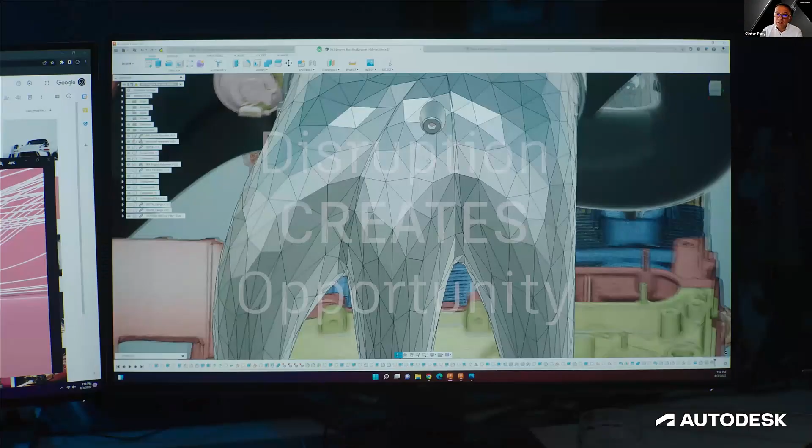The upshot of all of this is additional pressure on your team to deliver goods quickly, whilst minimizing costs, avoiding mistakes, and controlling waste. The good news is that this level of disruption also creates opportunities for all of us. In a static market, the incumbent suppliers are next to impossible to displace, but every now and then we experience major events that change the natural order of things, meaning those that can adapt fastest quickly become the new leaders.

We believe that now is the time to reimagine possible and to use this time of disruption and change to do things better. So for manufacturers like BBi Autosport that you see on my screen now, finding ways to control costs, maintain margins, fix supply chains, upskill people and attract young talent means they're better positioned to win market share today and grow their business tomorrow.

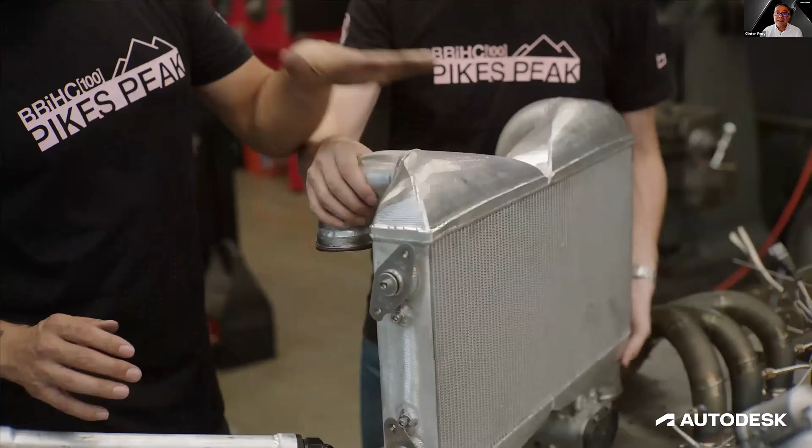Now, what do we mean when we say reimagine possible? There are many trends you can take advantage of right now. For instance, more and more industries are being transformed by smart products. This makes machine tools around us more productive, but it also creates opportunities as consumer demand grows, product developers expand, and supply chains onshore. Manufacturing processes themselves are increasingly becoming digitized, which provides greater flexibility and efficiency from the tools you use. And cloud technologies are changing how we manage our supply chains and the manufacturing processes we use, helping us deliver our products on time, every time.

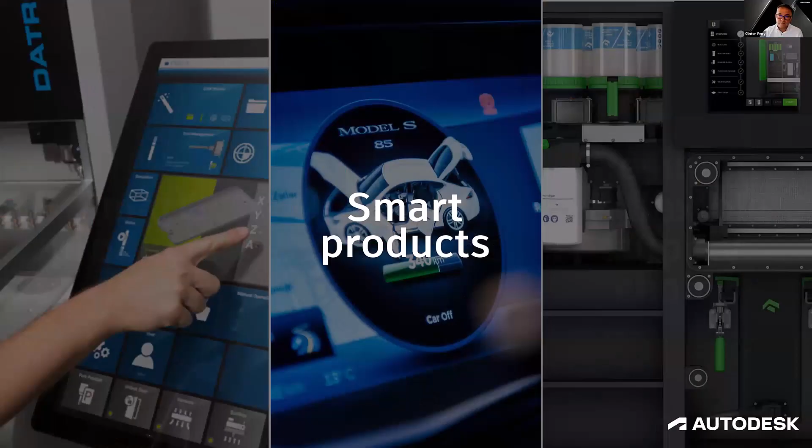Now, when you hear smart products, you probably think of an iPhone, a Nest thermostat, or maybe a Tesla. And that's certainly true in the consumer product space. But in recent years, we've seen more industries embrace smart technology, and it's playing an increasingly important role on the shop floor too.

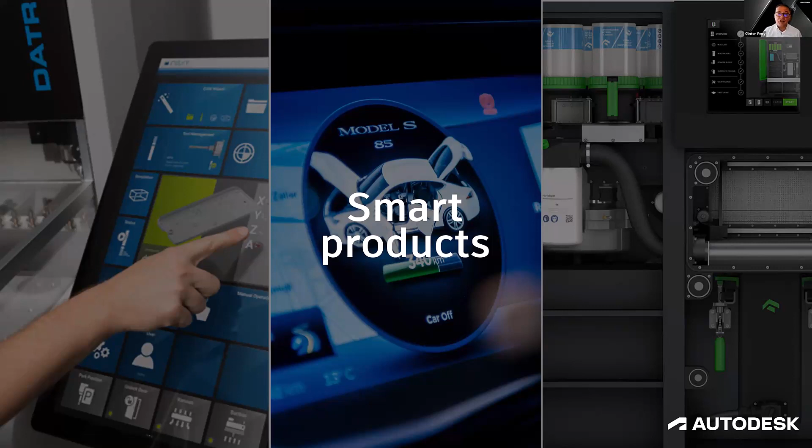Take, for example, smart hardware controllers from companies like Datron, One Click Metal, Haas, Mazak, and many others. These all represent the bleeding edge of smart manufacturing, and we expect to see this trend expand and accelerate across the rest of manufacturing. And it's not just products that are digitizing, it's also the processes we use.

Milling, turning, probing, welding, cutting, and 3D printing all provide a wealth of data for analytical purposes. But those processes aren't used exclusively. You use multiple processes to make your products. So it's a big problem when you have to use multiple software products to define and control your manufacturing processes.

And the situation gets way worse if you need to start making changes. So we believe that manufacturers like you want, in fact, they probably need a flexible platform, one that can accommodate design, simulation, milling, turning, fabrication, additive, and production management, all with data at the center of what you do.

And recent events have shown the challenge of connecting people and suppliers to this data, something that manufacturing has traditionally struggled to perfect. Now, we recognize the need for a flexible platform, one that can connect all aspects of the manufacturing supply chain, ultimately helping you to adapt faster.

Because investing in the right digital manufacturing solution can make the difference between winning and losing new business. And yet, despite all of these demands, manufacturers around the world still accept an old, antiquated experience.

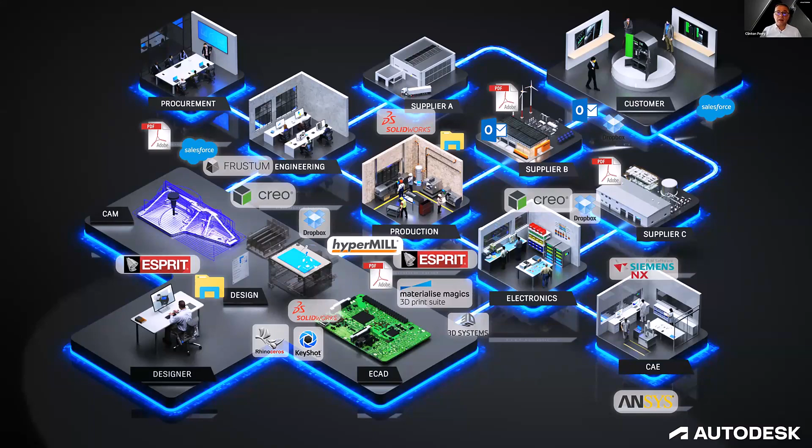Multiple software tools with incompatible proprietary file formats, poor data control with files being shared by email, wasteful manual processes and disconnected workflows, and a mix of digital and analog information. This all impacts your ability to work effectively, increasing the likelihood of mistakes, delays, and lost business.

And so, as manufacturers, we need to address these challenges, and we aspire to achieve 4 key values: to create better products, win more business, improve your operational efficiency, and finally, to enable increased innovation.

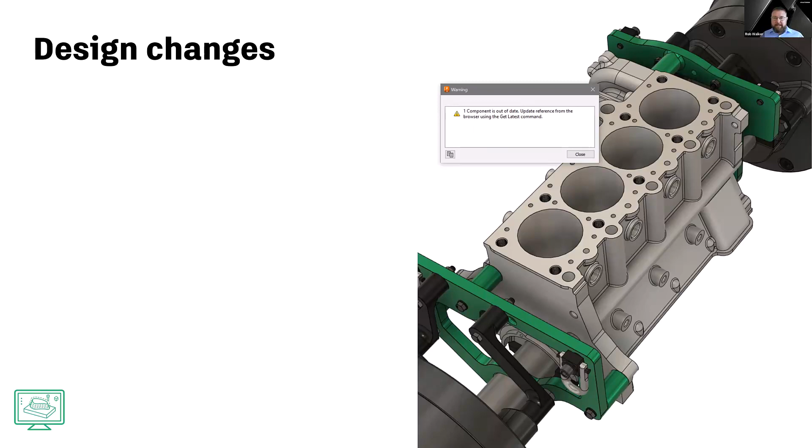Now, first, we have the need to cope with design changes. Design changes can be costly as they can delay production. But how are these changes communicated? What happens if a design change is not communicated before production begins, and what's the cost of this?

Now, the right software can help by simplifying the design revision process with seamless associativity between design and manufacturing. This provides a direct link so that your teams are always up to date with the latest versions. And this can be reinforced through effective communication methods, which inform stakeholders of design updates. By overcoming this challenge, you can then improve your collaboration across your organization.

Now, next, there is a need to automate to speed up manufacturing processes and reduce delivery times. But what do we mean by automated? Now, automated within the manufacturing industry comes in many forms, from assembly lines to industrial robots to the automated guided vehicles or AGVs. But for this presentation, we are focusing primarily on software solutions to help automate the processes of design and manufacturing.

Now, automation helps you reduce non-value added processes, and you can deliver repeatable and consistent workflows which improve quality and reduce human error and will ultimately result in more reliable products.

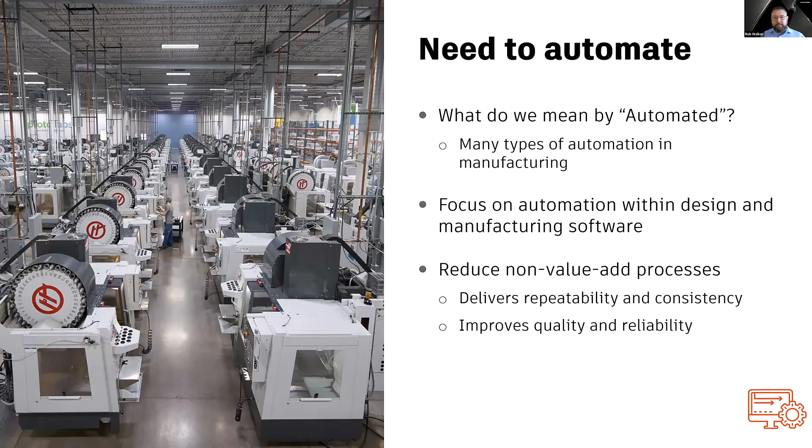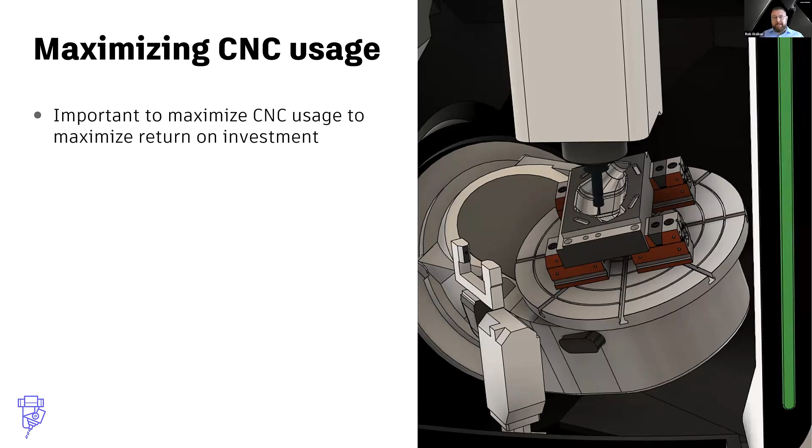Our next challenge comes from the CNC machine usage in your facility. Now, whether you have existing machines or you are purchasing new ones, it is important that you maximize their usage in order to maximize the return on investment in them.

Now, this can come in many forms, from the automation of the setup process to start machining sooner, to utilizing multi-axis capabilities that reduce the number of setups required and minimize tool lengths, and then through to in-cycle probing for verifying part accuracy during production, which maximizes uptime and reduces waste.

Again, the key is software that can produce safe, predictable NC code for CNC machines to enable lights out manufacturing, and ultimately improve your manufacturing throughput.

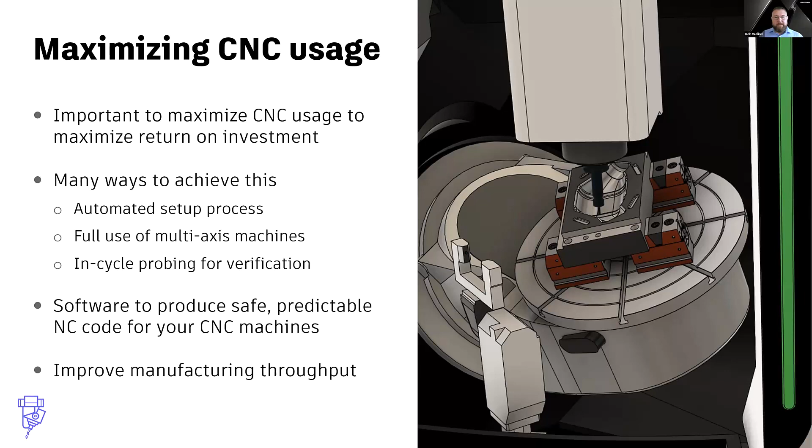This next challenge is inherently linked with the previous ones, where the need to improve part quality goes hand in hand with machine utilization and can be aided by automation. Quality issues can have an adverse effect on profitability, through the need to perform costly rework or manual processes such as polishing. And if not rectified, these can affect the reputation of the business, which in turn affects repeat custom.

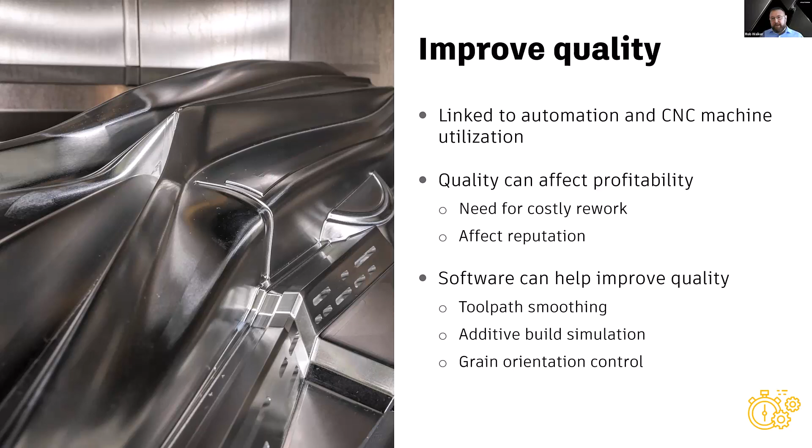To improve part quality and consistency, again, we use software. In addition to probing and multi-axis machining, manufacturers need advanced options to finely control the output of their machines and processes, such as toolpath smoothing, additive build simulation, and grain orientation for sheet-based fabrication. By improving quality, you can reduce the defects and non-conformities of your process.

The next challenge comes from the consumption of resources. When I say resources, this could be anything consumed across your business, such as the materials you use, the energy required to process them, and the people, time, and money that's involved in production.

Reducing your usage of resources has a direct effect on the bottom line of your business, but it also has an environmental impact. Simply put, if you use less, you reduce your carbon footprint, which boosts the sustainability of your business. By looking at ways to better manage your resources, you can reduce both consumption and environmental impact.

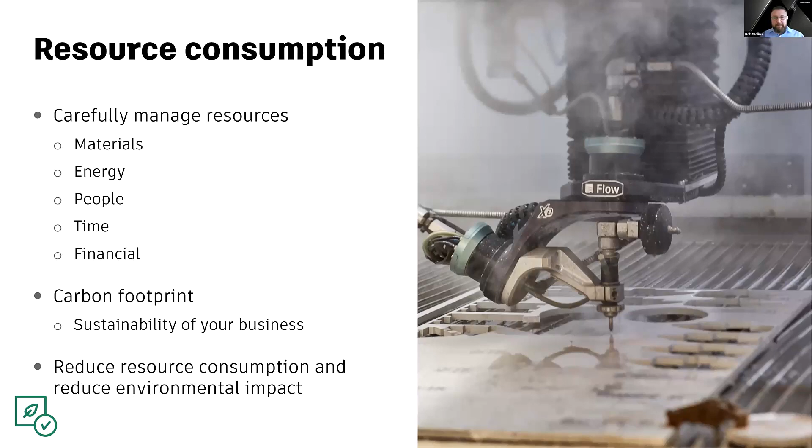Now, the sixth and final challenge I wanted to talk about comes from the need to fill the skills gap. The skills gap is something that has been widely spoken about, but fundamentally comes down to the gap between the number of skilled jobs available and an apparent lack of skilled people that are able to fill these roles.

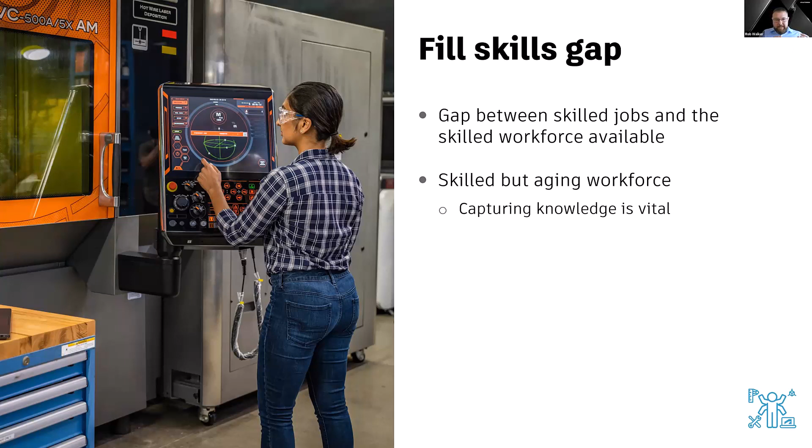Part of this problem is down to an aging workforce, which once retired takes a lot of craft, skills, and knowledge with them. This is difficult to pass on, so capturing this knowledge is vital to maintaining the skill levels within an organization. Therefore, we might look to software that can help capture this knowledge and store it for use by others within the organization, allowing best practices to be shared and collaboratively refined later.

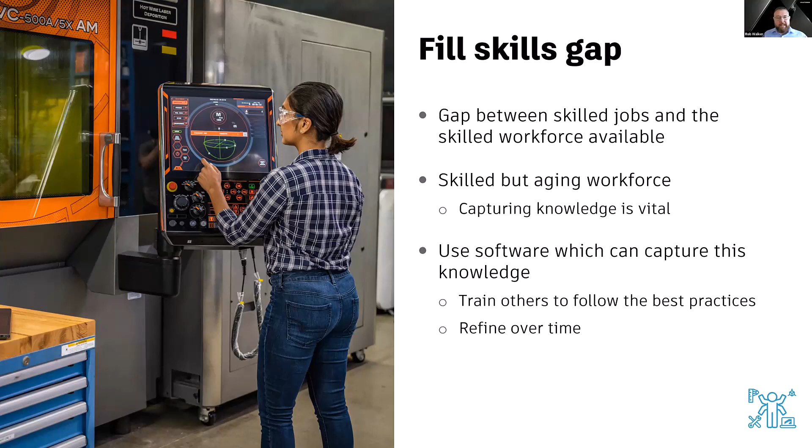This brings us back full circle to improving collaboration again. So clearly there are a whole range of operational challenges, and based on the poll, we can see that these are affecting a lot of you, quite obviously. So the thing to think about is how those range of operational challenges can be overcome, in order to achieve success within your manufacturing business.

You may have a range of outcomes that you are looking to measure, which in turn provide those values to your business that Clinton mentioned earlier. For example, you might be looking to improve your manufacturing throughput, which can be done by finding ways to produce more output in a given timescale.

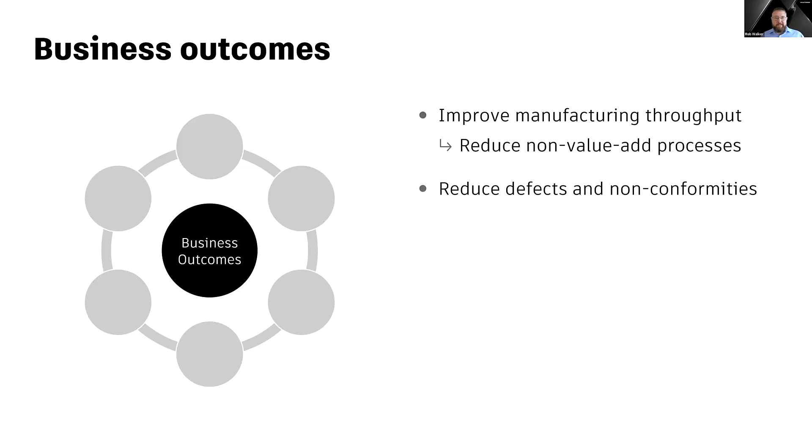If so, it is likely that you will be looking to reduce the non-value add tasks in your processes to remain productive. And being productive means creating good quality parts, so reducing defects and non-conformities is a must. If you reduce defects and non-conformities in your production, you will scrap fewer parts and therefore reduce the consumption and effect on the environment.

And if you improve collaboration across your organization by connecting people to your data, your workflows and manufacturing processes that they use, then you can speed up the process to get from design to manufacture, improving your time to market. Each of these outcomes could stand on its own, but they are also invariably linked to each other, and they are triggered by overcoming the challenges I just mentioned.

So choosing the right software technology can help you overcome these challenges and achieve your outcomes. The ideal result being that you are able to make more parts, make better parts, and use less resource making them, which brings us neatly to Fusion 360.

Thanks, Rob. Yes, let's talk about Autodesk Fusion 360. What is it? What does it do? And how can it help your business achieve the outcomes we've just been talking about?

Before we explain what Fusion is, it's probably easier to start with what it isn't. Fusion 360 isn't just a PLM system. It's not PDM, MES, or CAD. It's not just CAM or simulation, documentation, rendering, or electronics. It doesn't just focus on additive, milling, fabrication, or turning. It's not one of these things. It's all of these things.

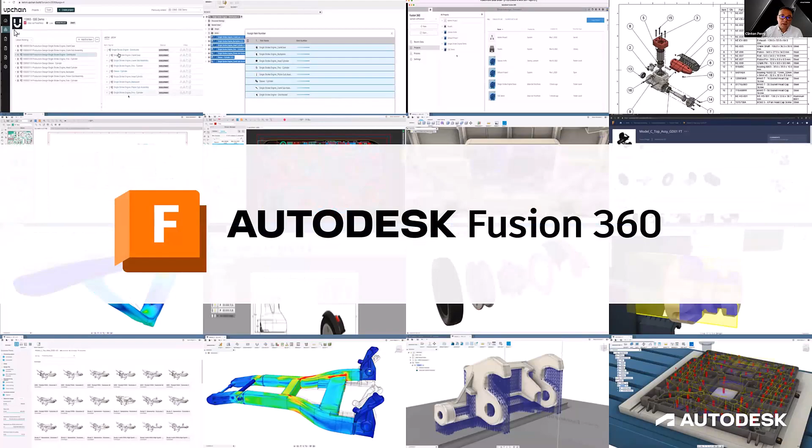That makes Fusion 360 fast. Fast because its modern app-style interface and user experience slashes learning curves. We're talking days, helping you to become productive faster than many outdated products that are on the market today.

It's fast because it uses cloud-based technology to connect your people and your suppliers to your data, your workflows, and the processes that you use. And it's fast because it provides automation tools to remove non-value add tasks to help you make better products with fewer button clicks. And this focus on speed supports your business and ultimately allows it to grow and succeed.

Autodesk continues to invest in manufacturing, having already spent more than $1 billion in our software solutions in recent years. We continue to add capabilities into Fusion 360 by developing, acquiring, and investing in technology, including advanced manufacturing from our investment in Delcam, mold simulation from Moldflow, NC code post-processing and verification from Camplete, and manufacturing execution from ProdSmart.

Unlike many traditional manufacturing software products that offer annual updates, we release a major update to Fusion 360 every 8 weeks. This means we're able to provide our latest technology and react quickly to customer needs when they arise. This is reflected in the growing number of commercial subscribers to Fusion 360, with more than 1 million monthly active users today, which is an amazing achievement.

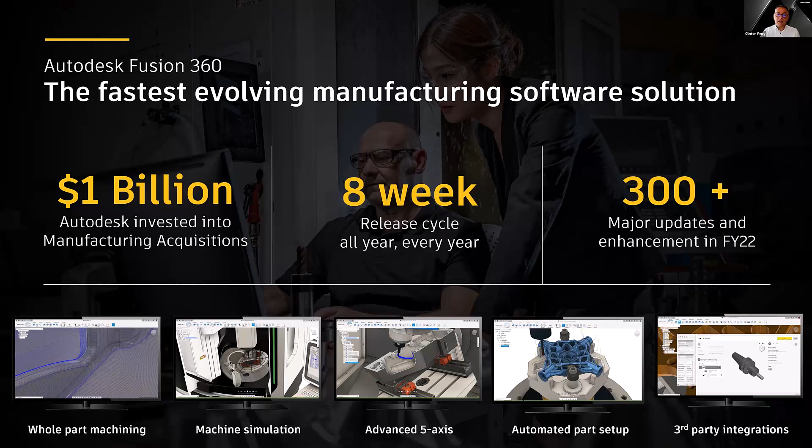Thanks, Clinton. Okay, so going back to that need to address the challenges, we can look at the outcomes and see how Fusion 360 can help your business achieve them. We start with ways in which you can improve your manufacturing throughput by reducing non-value add processes, using automated programming tools to enhance manufacturing processes, minimize waste, and improve consistency.

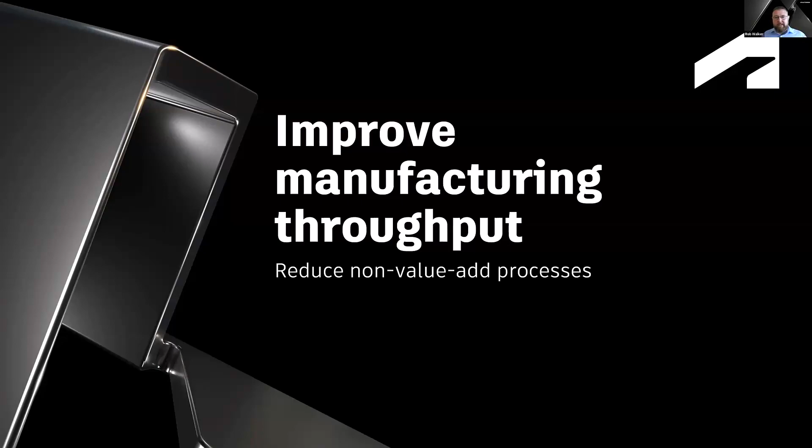Embracing automation within your manufacturing processes can have a huge effect on your manufacturing throughput. Manufacturing throughput can be increased through the use of automated programming tools in Fusion 360, such as hole and pocket recognition, so profiles can be detected and programmed automatically, automating decisions that would have previously been made manually. By automating, no matter who is programming, the resulting output can be the same, allowing flexible changeovers, improving result consistency, and ultimately component reliability.

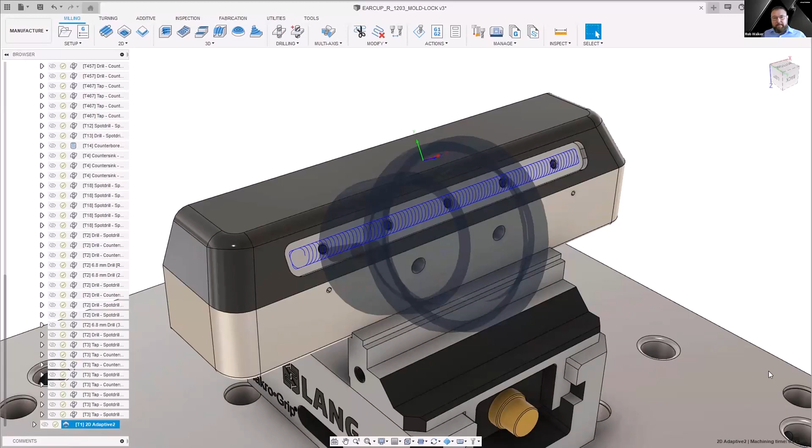Manufacturing knowledge and best practices can be stored as templates and shared with the entire manufacturing department to automate programming. This helps less experienced members of the team become more productive sooner, bridging that skills gap and improving programming consistency.

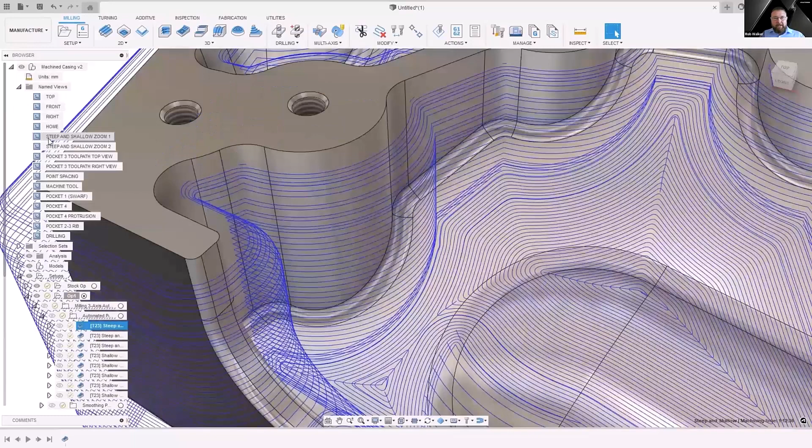Taking this even further, intelligent automated toolpaths like steep and shallow tackle the finish of freeform surfaces, automatically detecting the surface geometry and applying the optimal strategy to different model regions.

Steep and shallow provides a 4-in-1 toolpath, meaning that as well as the combined toolpath itself, it can also be used to access individual operations with a range of options to control toolpath angles, wall clearance, continuous spiral motion, cusp removal, and smooth offsets, all designed to help achieve the best possible surface finish.

There are also additional toolpath smoothing options to help tailor the point spacing to better suit your CNC controller, reducing the need for manual rework and improving your manufacturing throughput even further. Now, complex high-value parts often contain features and details which cannot be produced using 3-axis machining alone.

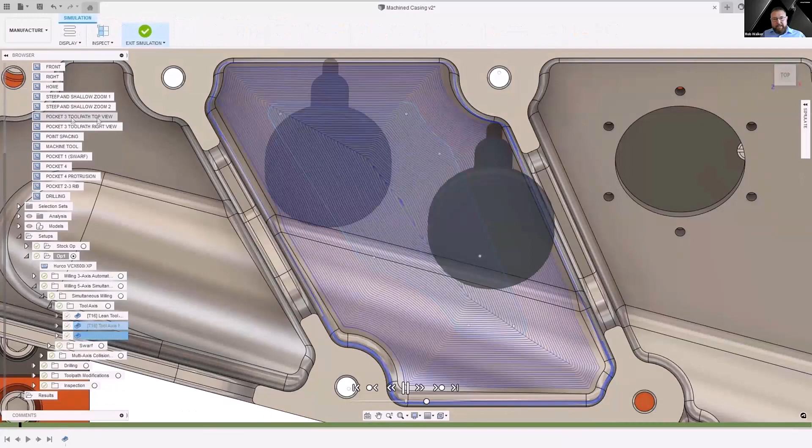This is why Autodesk Fusion 360 offers simultaneous multi-axis operations to fully utilize the 5-axis capabilities of multi-axis CNC machine tools. When part complexity increases further, automatic collision avoidance can be used to provide an optimal tool axis solution. This all provides better workpiece access, allowing the use of shorter, more rigid tools for improved surface finish and a reduction in the time spent on multiple setup parts.

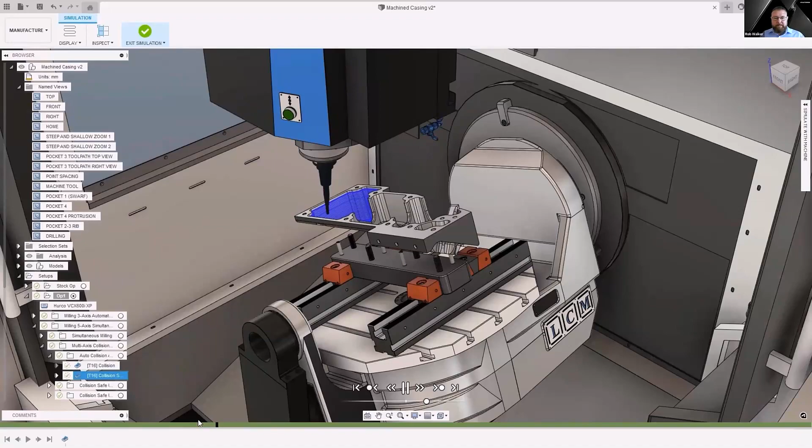Automation is not just limited to CNC machining. For fabrication processes, automated nesting will automatically detect component material thicknesses, distributing the appropriate numbers of parts into different material sheets, removing the time-consuming sorting processes from your workflows, and reducing the time it takes to get from your design to cutting the pieces ready for fabrication.

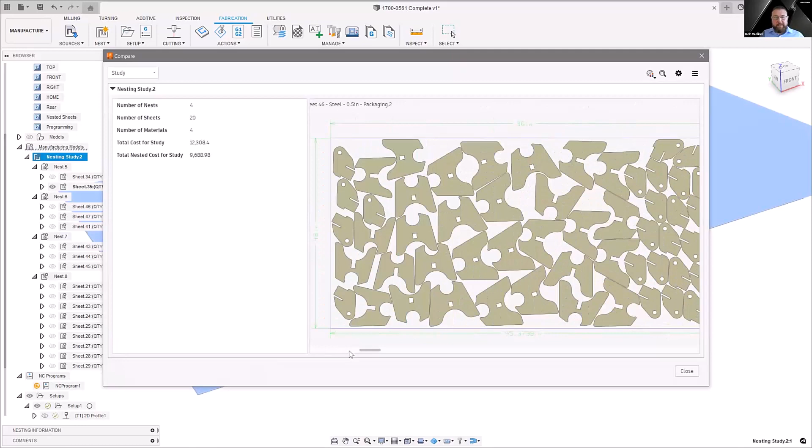There are many things that can be done to reduce non-value add processes and increase throughput. But what if we want to manufacture parts with the same or even increased demands on quality and accuracy? If that's the case, then we must look to reduce defects and non-conformities in our processes, which in turn will reduce resource consumption and reduce environmental impact.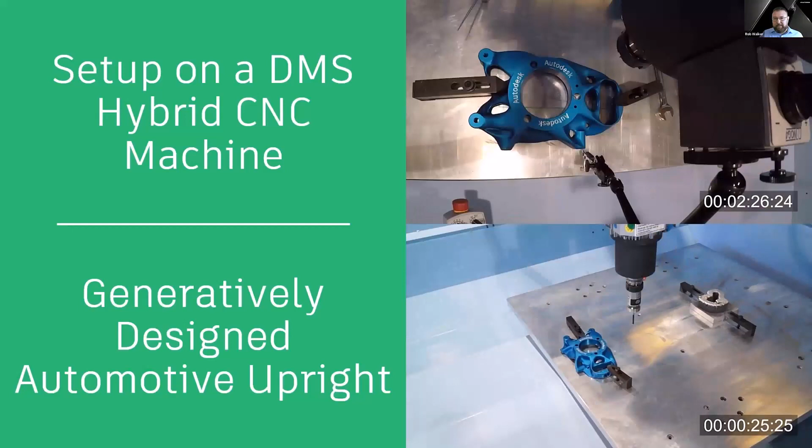Linking back to the previous section, automating your setup of your part is a key area for reducing defects and non-conformities. Here we have a comparison between a manual setup and an automated sequence on the same part. In both cases, the time code at the bottom right of each video indicates the time taken, but note that the manual video is running significantly quicker than the automated setup video.

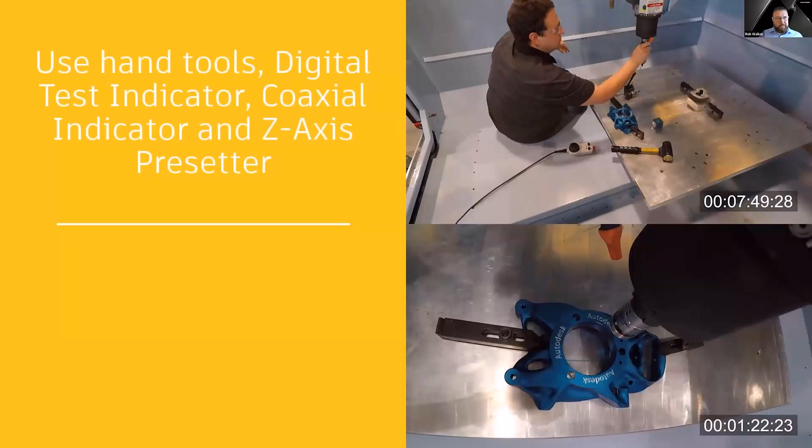Even for an experienced operator, this process is difficult and time-consuming to do manually, and this is especially true for large, heavy, or non-prismatic parts. The result is that the machine sits idle and not cutting parts, which eats into profit margins.

So by programming setup sequences offline and running them as quick, repeatable, and accurate NC programs, profitability can be maximized as machine time can be better utilized for production rather than wasted through workpiece setup.

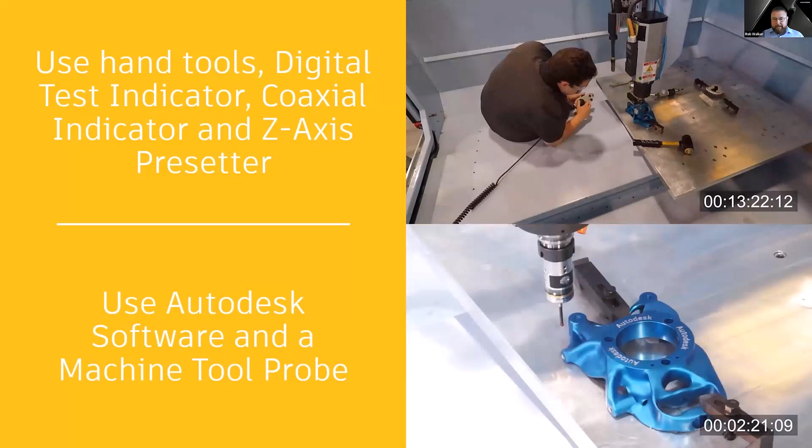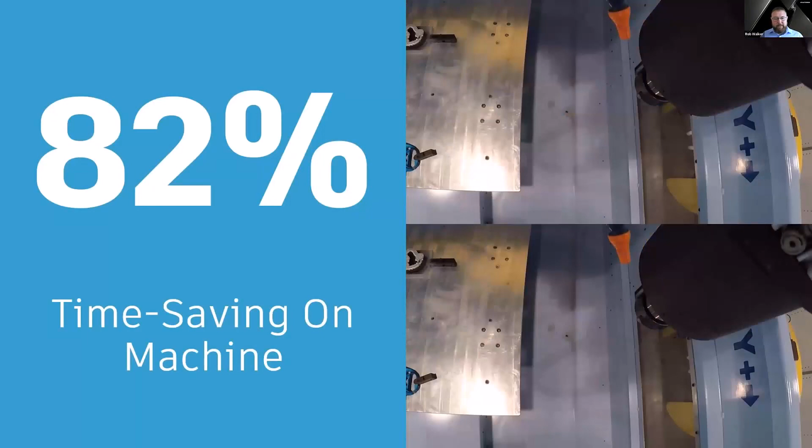Even in this simple example, the manual setup takes over 15 minutes, whereas the automated setup takes just 2 minutes and 40 seconds, representing an 82% saving in time on the machine. So to reduce defects and non-conformities, using an automated setup process becomes an obvious choice.

The integrated environment of Fusion 360 means that part setup, programming, and verification on the machine are unified into a single user experience. This lets you quickly and accurately set up and check stock material and parts on the machine and create the required toolpaths without leaving the Fusion 360 environment.

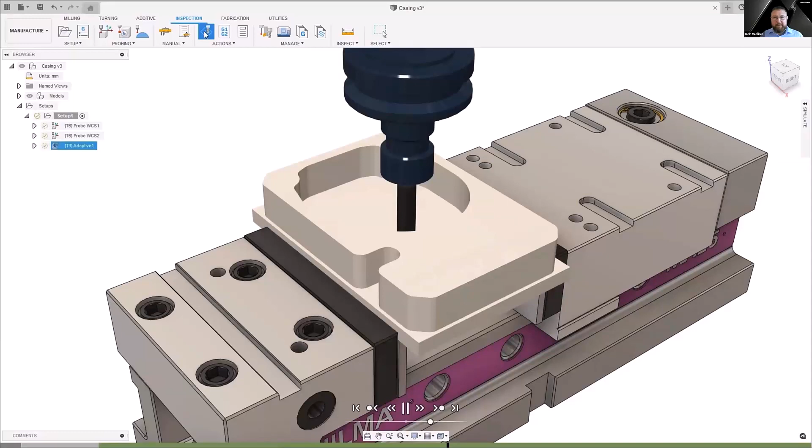Geometry features such as hole sizes and channel widths can be measured. The results are then reported against tolerance, where adjustments in tool wear can be made for subsequent operations to improve part accuracy.

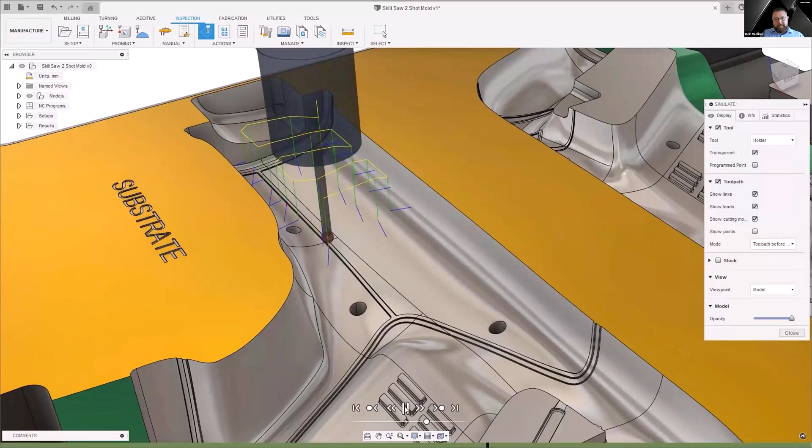And the same technology is also used for part verification without taking the part off the machine. This allows part accuracy to be checked before moving to subsequent processes or final inspection. Any unexpected variation can be detected and remedied immediately, minimizing costs and improving efficiency.

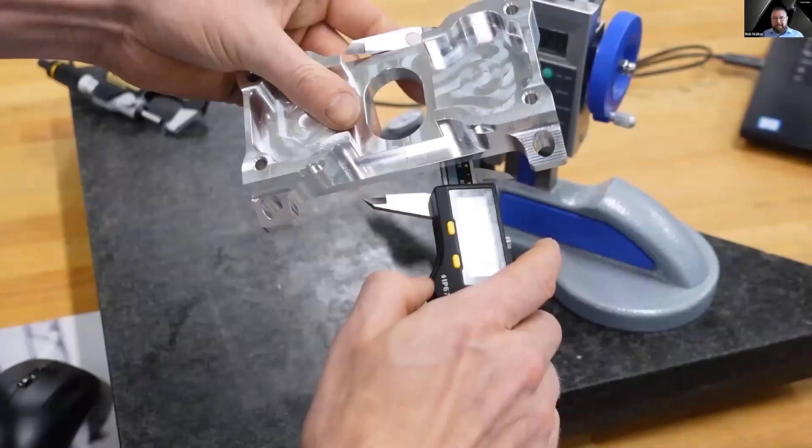Product manufacturing information, or PMI, which is defined at the design stage, can also be imported into Fusion 360. This can be used to help check that the parts you manufacture have the correct dimensions and tolerances that the designer defined, with the ability to input measurement values manually using devices like height gauges, micrometers, calipers, and so on, to record that your parts conform to the design specifications.

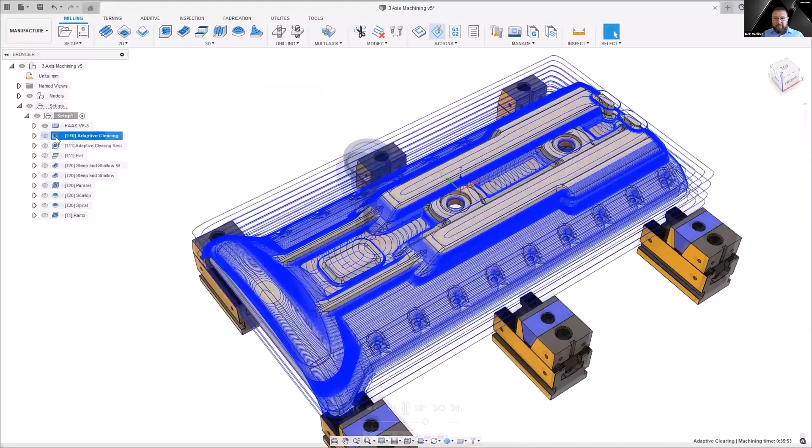Excess material can be efficiently removed using adaptive clearing. This proprietary algorithm optimizes feed rates as the engagement angle of the tool is maintained throughout the cut. This shortens the overall machining time since the full flute length of the tool can be used, but it also increases tool safety and decreases tool wear, reducing cutting tool consumption.

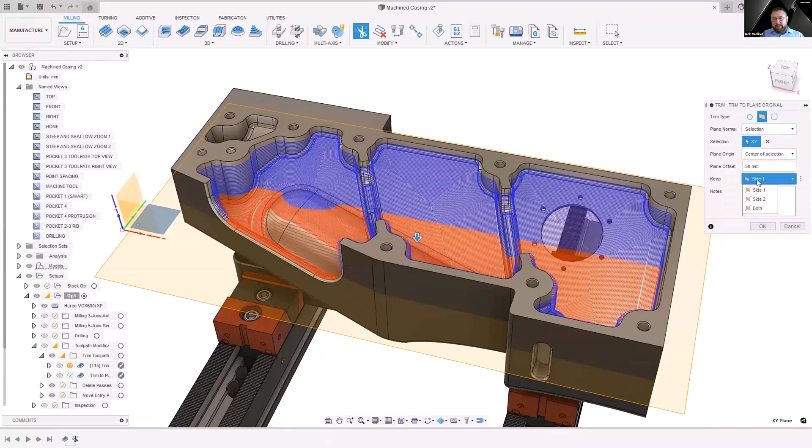The modification of calculated toolpaths can also be performed, such as splitting toolpaths, deleting unwanted segments and passes, replacing tools for things like better clearance, and also movement of start points. All of which can be done crucially without the need for full recalculation, which saves programming time, a precious resource.

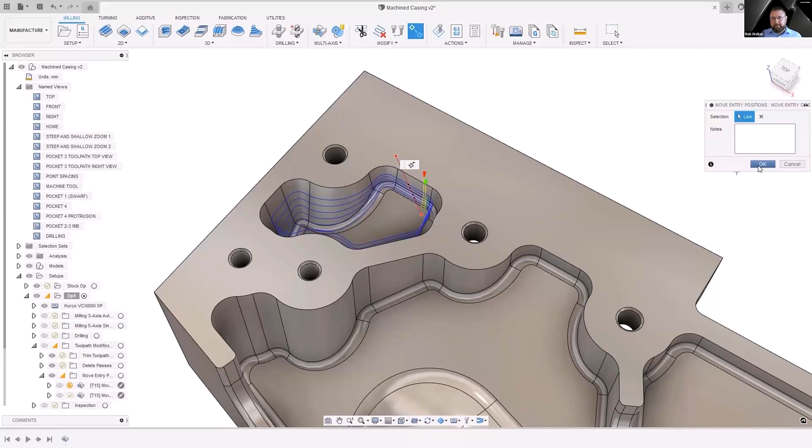When it comes to sheet materials, automated nesting can be used to quickly identify physical material properties and then efficiently lay component pieces out to maximize the available material. The key thing here is we're reducing waste and subsequently environmental impact.

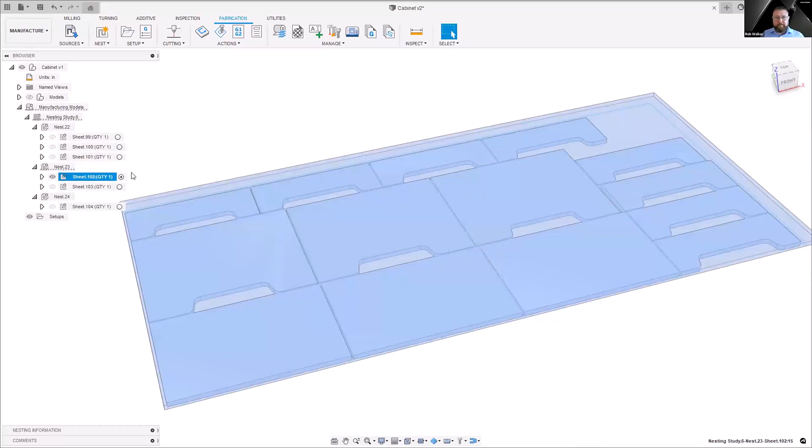Multi-axis positional machining drives towards both outcomes by reducing the cost of fixturing as parts are produced in fewer setups, streamlining manufacturing processes. And since that part remains on the same machine setup for most of the manufacturing process, you maintain tighter tolerances between features as compared to using a multiple setup process where errors can compound quickly.

And whilst additive shouldn't really be forgotten, build simulation can reveal potential defects, allowing parts to be corrected before sending to printing.

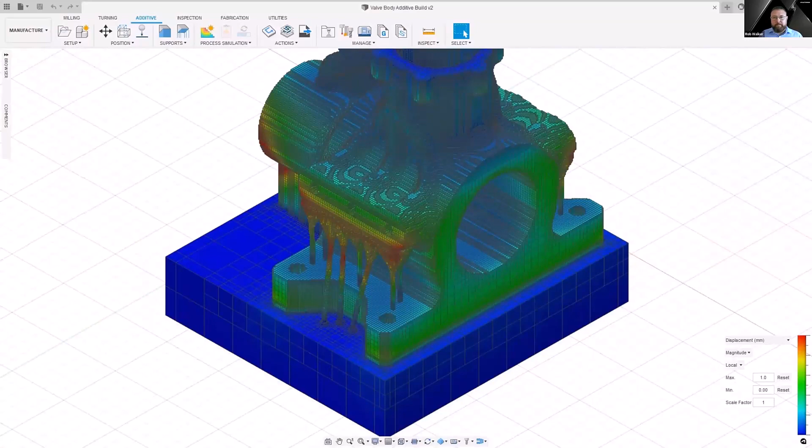And lastly, but certainly not least, is machine simulation. Machine simulation helps you verify your machining processes in a digital environment, providing the opportunity to analyze, identify, and rectify toolpath processes before they get to the machine.

This provides confidence that your machining processes are helping to prevent any costly collisions and reducing the chance of scrap parts, allowing your machines to be productively producing parts, not repeated dry runs.

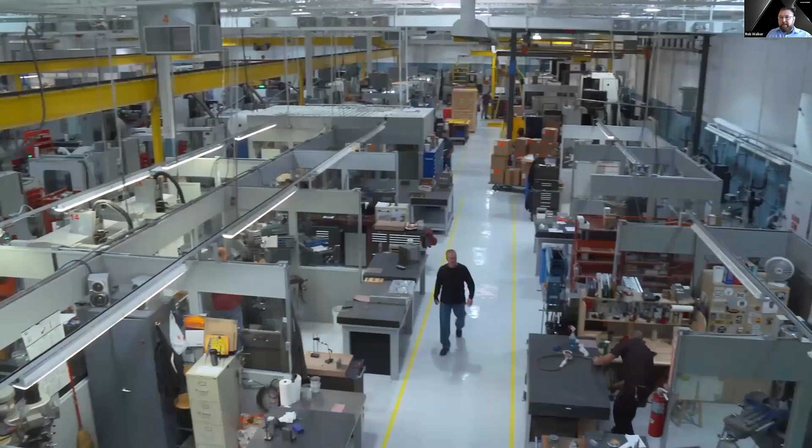Okay, so finally we come to improving collaboration and improving time to market. The manufacturing team is just one part of a larger business, so it's important that this team can collaborate both easily within itself as well as the wider organization.

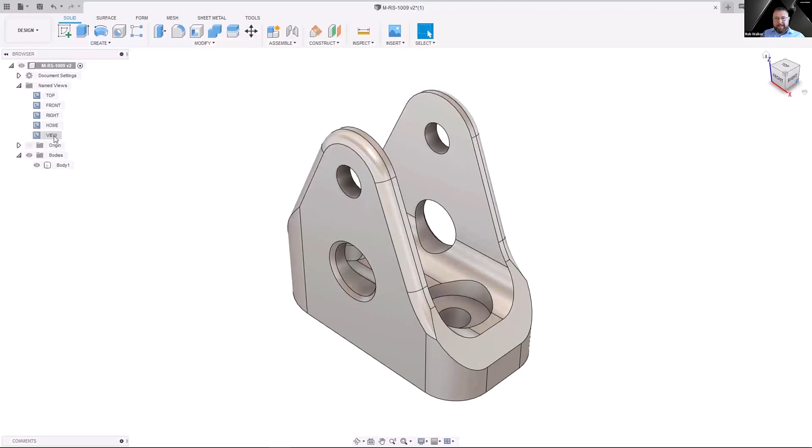Fortunately, Autodesk Fusion 360 was built to support flexible dynamic collaboration workflows through the utilization of a cloud infrastructure. When a design department releases the latest design, the manufacturing department can get to work quickly, accessing that model data from the cloud to prepare and program for manufacture.

Program toolpaths and fixtures are stored on the cloud too, along with tools, post-processors, setup sheets, and even NC code, allowing easy access to the data as a team needs to work effectively and efficiently.

This data can be accessed from anywhere, from PC, Mac, or mobile, and shared through team access or through simple links with download and password options, allowing full control of data access.

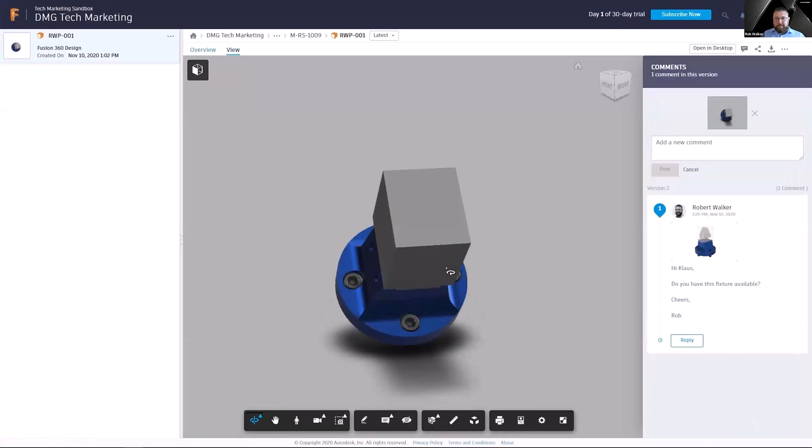Now, since this data is hosted in the cloud, external collaborators can be given secure access too. This is using Fusion 360 Team Participant to upload, download, view, mark up, and collaborate on projects. This seamless collaboration streamlines project management, allowing issues to be quickly addressed, improving communication, and helping avoid costly delays. This ultimately improves the level of service users can provide to their customers, increasing the likelihood of repeat business.

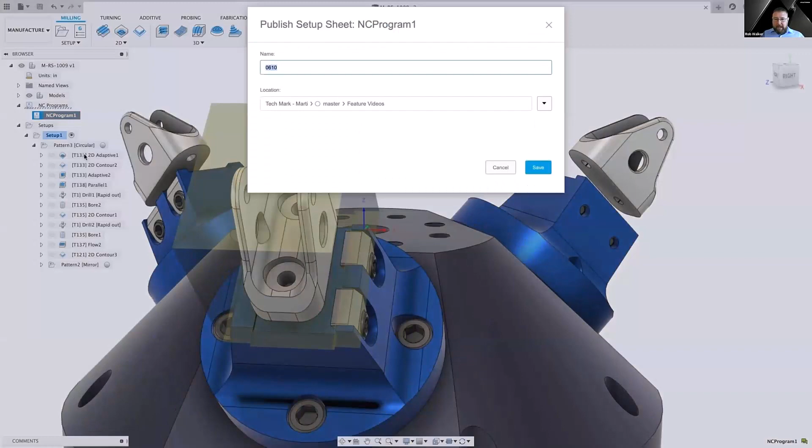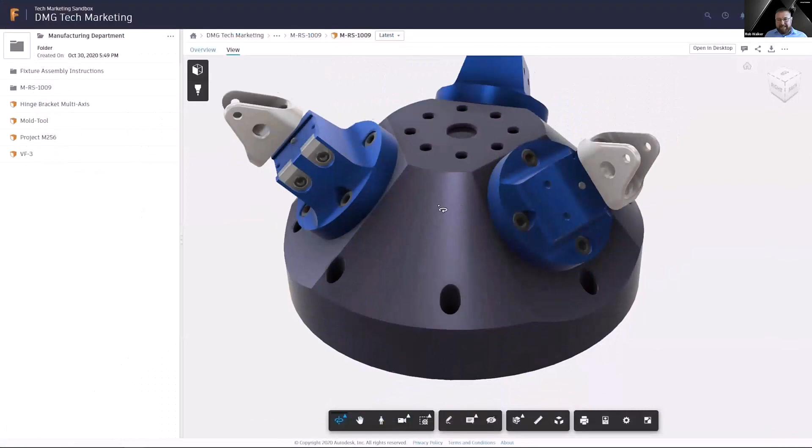And because everything is hosted in the cloud, everyone is working on the latest data. So programmers can share their setup sheets with operators. Operators can update cloud libraries for programmers. Designers can communicate design changes to programmers, and assembly teams can receive instructions on fixture assembly. And this is all quickly and easily within the cloud. So by using Fusion 360 and Fusion 360 Team Participant, seamless collaboration workflows can be unlocked to keep teams connected, whether they're across the hall or even across the world.

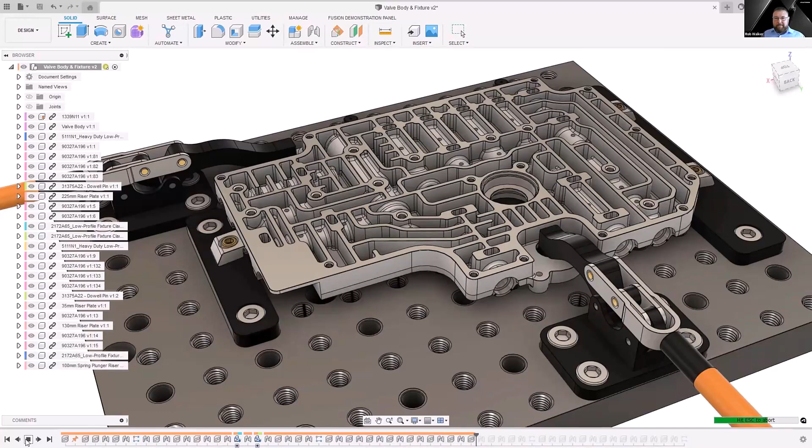Now, Fusion 360 integrates powerful and easy to use modeling tools alongside its intuitive manufacturing tools. And because the design and manufacturing tools are integrated into the same environment, this means you're able to go from design to machining faster. Now, additional elements such as hole caps, extension surfaces, and so on can be added to aid the manufacturing process. And fixtures and work holding models can be created from your own design or brought in from a range of suppliers and quickly included and positioned within your Fusion 360 file to hold your parts accurately and safely.

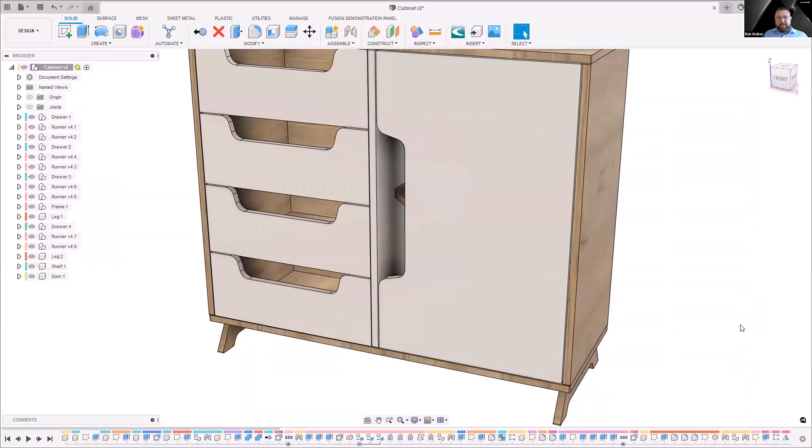Importantly, though, if the original design changes, the associativity of Fusion 360 means that work-holding fixtures, nested parts, setups, and toolpaths will all update seamlessly, reducing the risks associated with change orders and letting the manufacturing department be more productive.

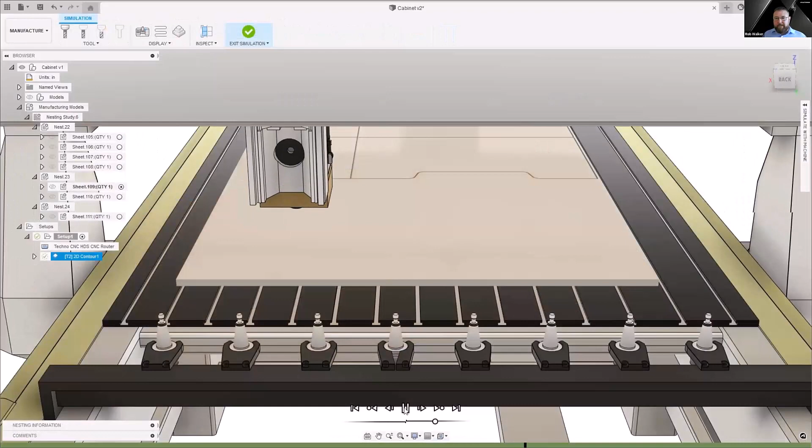Now, the associativity even extends to third-party data because Fusion 360 lets you collaborate and manage CAD data with anyone, regardless of the CAD software that they're using. This removes the need to translate their data while still maintaining a link to the original CAD file. The result is that any updates to the original third-party file will also be reflected in Fusion 360. And so design associativity lessens the impact of the issues caused by design revisions, improving your time to market.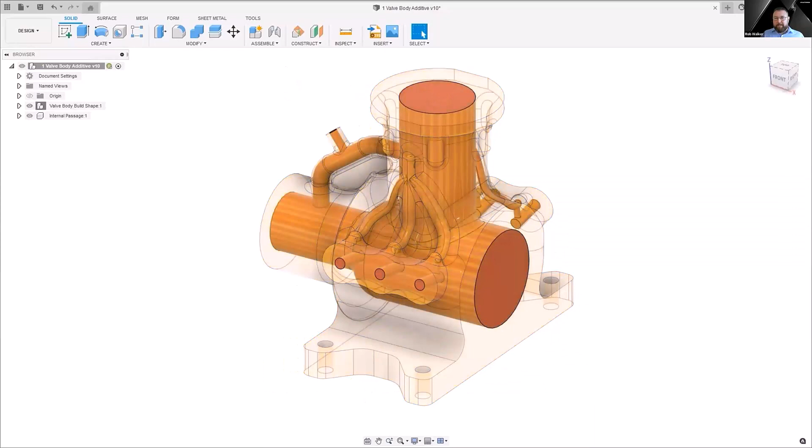And lastly, there's additive prototyping. So speeding up the process to get you from concepts on the screen to reality can be realized through additive manufacturing. Fusion 360 supports both plastic and metal additive processes with modeling tools to make parts print-friendly and a host of tools specifically made for additive, such as support structure creation and build simulation. Combined with subtractive manufacturing processes, prototypes can be rapidly created, improving your time to market.

So probably a lot of questions on your mind is, how is this technology within Fusion 360 accessed? Well, Fusion 360 uses a flexible access model. So to illustrate this, let's look at a simple diagram. Now, Fusion 360 delivers a range of capabilities within a core offering, which includes CAD modeling with 2D drawing, 3D solid and assembly modeling, computer-aided engineering with cloud solvable mechanical and thermal simulations, CAM programming, including 2D, 3D and positional multi-axis or 3+2 machining, and workpiece coordinate system probing.

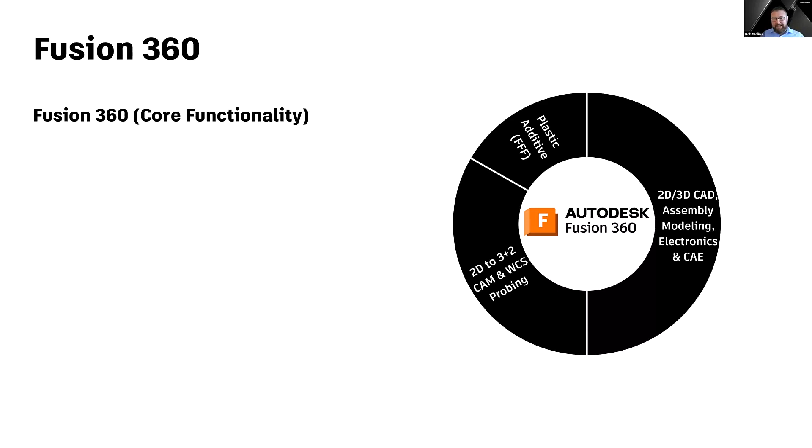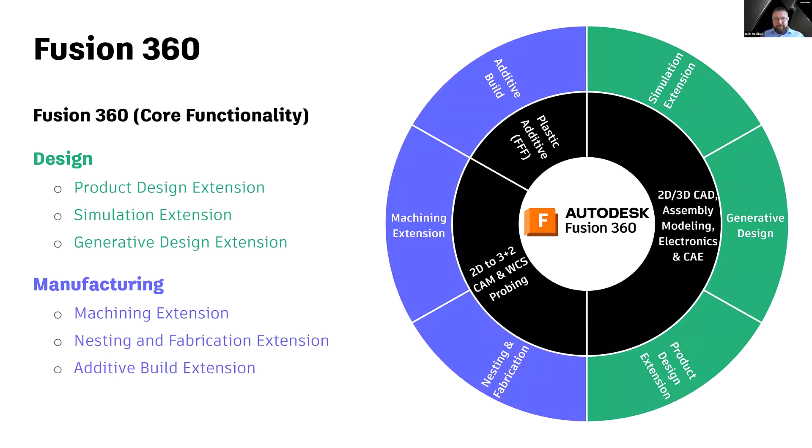There are additive capabilities to support plastic additive fused filament fabrication or FFF, fabrication tools for sheet-based production, electronic tools for PCB design workflows, and cloud-enabled collaboration to help your teams do what they do best. Now, layered on top of that, we offer Fusion 360 extensions at an additional cost. Now, these unlock additional advanced capabilities within the same Fusion 360 interface, with different extensions serving the needs of both designers and manufacturers.

In today's presentation, we've been focusing on both the core functionality and the extensions relating to manufacturing. So how would this work across a manufacturing business? Now, your organization might look something like this, or it might be completely different. But for illustrative purposes, in this example, we have offices and we have a shop floor.

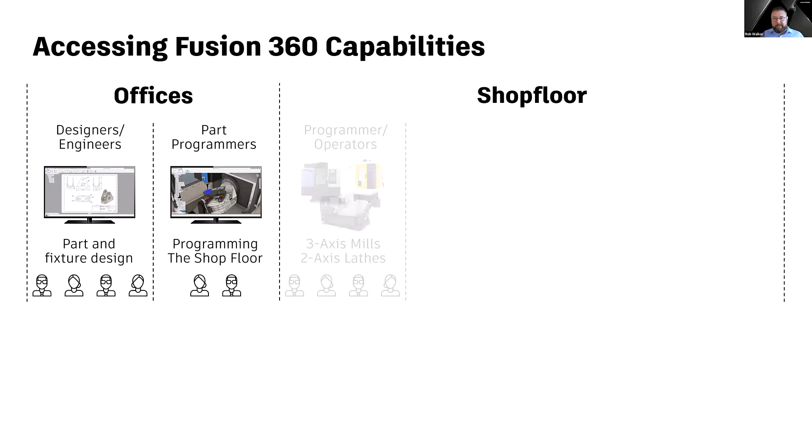Now, within the offices, there is a design team, perhaps creating products or designing fixtures for manufacturing, and perhaps a team of part programmers responsible for programming all of the machines on the shop floor. On the shop floor itself, we might have programmer operators running 2-axis lathes and 3-axis machines. And perhaps we have more complex multi-axis machines, or maybe fabricators using routers, lasers, water jets, and so on. And we might even have an additive manufacturing need, so perhaps a research and development team, or even using additive for production.

Now, in this scenario, every member of the team can be given access to Fusion 360 if they need it. The low cost of entry and core functionality of Fusion 360 means that it is more than capable of meeting the needs of much of this business for design and manufacture.

Now, if more advanced functionality is needed, for example, addressing the need for simultaneous multi-axis machining, then the appropriate extension can be switched on, such as the machining extension for the programmer operators on the shop floor, or the part programmers in the office responsible for programming all of the machines. And this is without the need to install additional software.

Now, the same mechanism is adopted across all users, but crucially, access to Fusion 360 extensions is totally flexible, meaning you can choose which ones to activate based on your business needs. What's more, extensions can be accessed for a single day, a month, or a year.

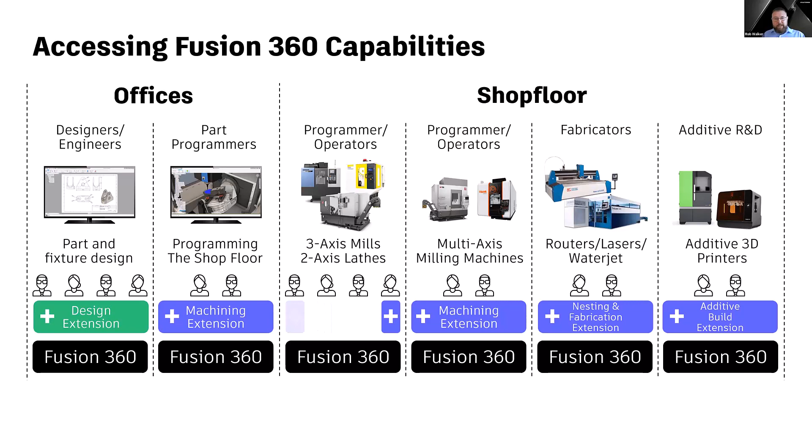So if you have short-term projects that would benefit from extension functionality, like the need to automate whole part machining strategies, or surface probing for castings in 3-axis machining, then an extension can be switched on to satisfy the needs of that specific project. And perhaps even more importantly, they can be switched off when the project is complete. So the choice is yours, meaning you only pay for what you need when you need it.

Lastly, and significantly, we have the data at the center linking everything together. Now, with everyone connected through the cloud to Fusion Team, this means that regardless of whether your team members use the extension or not, they can all access the same data on the cloud.

Allowing them to collaborate and share things such as CAD data, tool libraries, fixture assembly, setup sheets, and more. Everyone can access the data they need and analyze it for their specific use.

And it is this mechanism that is used, for example, by experienced users to share projects and programming templates with the other programmer operators to help bridge that skills gap, and how CAD model changes are associatively linked to their appropriate manufacturing processes downstream. Now, this improves collaboration and also helps when we think about suppliers.

So access can be given to your suppliers, speeding up delivery times and improving your time to market.

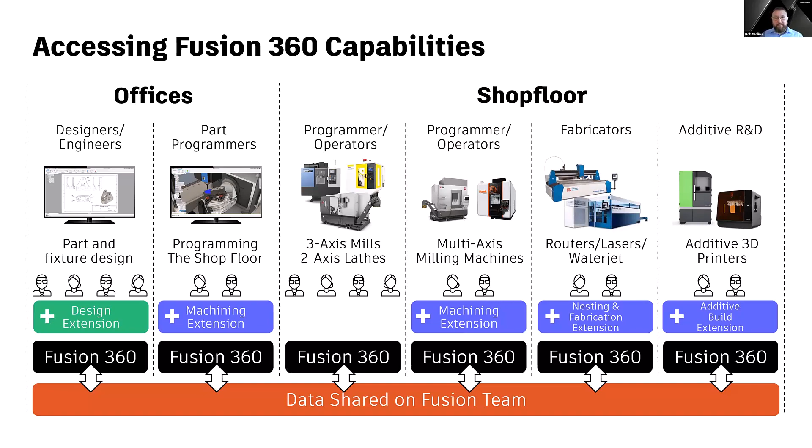So we've covered some great capabilities there. Rob's done a great job of showing the potential business benefits that Fusion has to offer. Before we start wrapping up, I'd like to showcase a couple of customers that are really showing how they're using Fusion 360 to achieve the outcomes that they look to set out.

And we're going to start with the world's largest sports equipment retailer, Decathlon. And for many of you, I'm sure you've been there many times and love the place. Now, it was founded in 1976 in Lille, France. Decathlon is truly unique, though, in its space, as it manages the full research, design, production and distribution of its products through a global network of more than 1,600 stores. The company holds three key values at its heart: performance, price, and a respect for the environment.

Now, balancing innovation with mass production can be challenging. I'm sure you all have first-hand experience of that. But innovation is a core part of the Decathlon culture, as is their commitment to reducing carbon emissions, having made a commitment to reduce by 40% per unit sold by 2026.

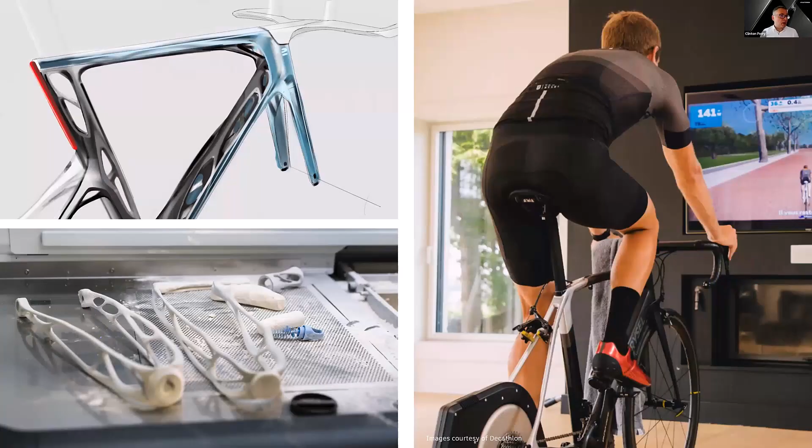Now, the Decathlon engineering team decided to embark on a project with its bike brand to explore the performance bike of the future. Now, most performance road bikes are made from carbon fiber, a material that is both high in strength and low in weight, but also wasteful to produce and very difficult to recycle.

The engineers decided to use Fusion 360 and its generative design and additive manufacturing capabilities to 3D print the frame and forks in metals locally and on demand, slashing weight, reducing carbon footprint and making it recyclable too.

And ultimately, Fusion 360 is playing a central role in helping Decathlon to change the very nature of what they do. And as Charles Cambianaghi, Advanced Design Project Leader at Decathlon, proudly states, the Fusion platform is allowing them to create products that have less environmental impact and more emotional impact.

Moving on to Conturo Prototyping, founded in Pittsburgh, Pennsylvania in the US in 2016, this specialist contract manufacturer uses CNC machining and additive manufacturing to deliver short production prototype runs to a growing list of aerospace, robotics, and medical customers. The company's unique selling point is its ability to meet the tightest of specifications and deliver finished parts quickly, allowing their customers to shorten their overall product development times.

Now, the very nature of prototyping means that the Conturo team must be able to adapt to the ever-changing challenges that they face. With such a diverse range of projects, the flexible nature of Fusion has been central to the business success. They invested in Fusion 360 and the machining extension to make better use of their 3- and 5-axis CNC machines. And they did this by unlocking capabilities that Rob has covered before, including automatic part alignment, multi-axis machining, and automated hole and pocket milling.

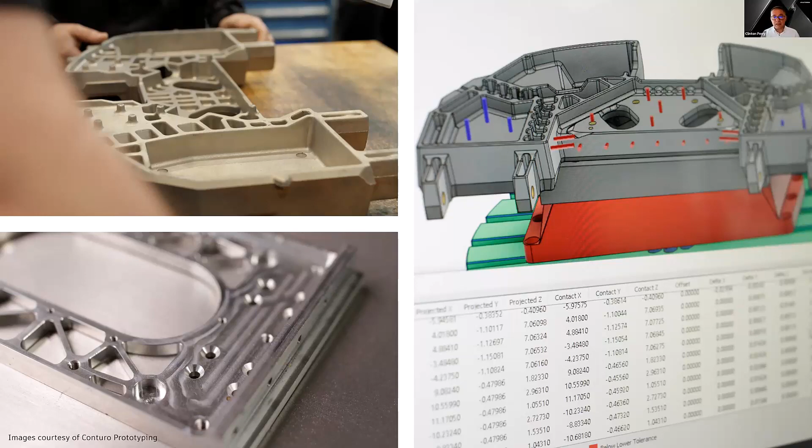And ultimately, Fusion 360 has helped the Conturo team to differentiate itself, reducing its costs and winning more business. As Patrick Fee, shop manager, states, Fusion is such a great value that it's paid for itself in the first few weeks and the very first project.

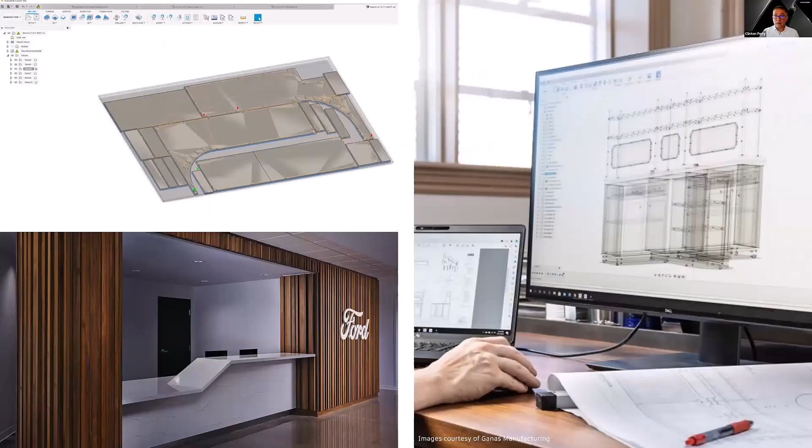Finishing with Detroit-based Ganas Manufacturing. Founded in 2015, this custom millwork and bespoke furniture manufacturer serves both residential and commercial clients. It prides itself on combining traditional craft skills with precision machining to produce exceptional installations. But the company recognized the need to improve its production process to overcome some long-standing issues: poor material utilization, costly human error, a lack of process consistency, and delays caused through rework. The company invested in Fusion 360 and the nesting and fabrication extension to design and manufacture their products using a range of 3- and 5-axis routers, and the results were huge.

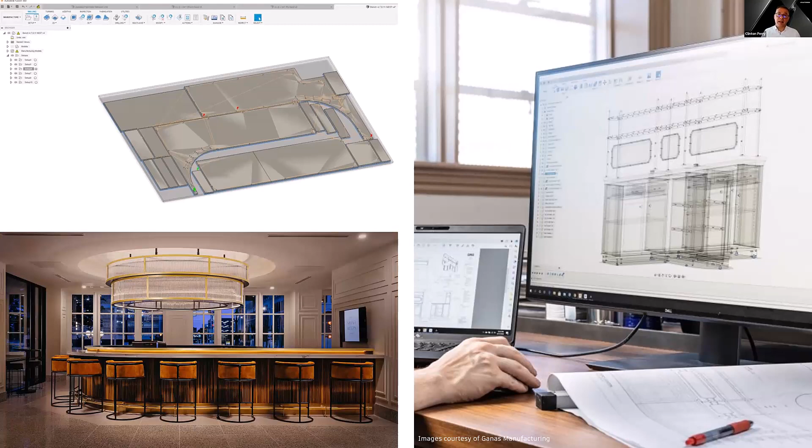First, they saved time and materials using automated nesting, reducing typical waste per project from 25% to 5%. Secondly, they automated repetitive tasks, removing laborious and error-prone processes where every nest had to be calculated and cut by hand, replacing it with an automated solution using predefined templates that delivers predictable results every time. And finally, reducing scrap and rework by removing the need for manual data input, which eliminated human errors and gave the team confidence that their machining process is 100% right every time.

Investing in Fusion 360 has freed the Ganas team from worrying about production problems and allowed them to focus on designing and delivering highly efficient products with perfect fit and finish. As Richard Ganas, the owner, states, Fusion has played a central role in the business achieving many of its outcomes and overcoming those legacy production problems.

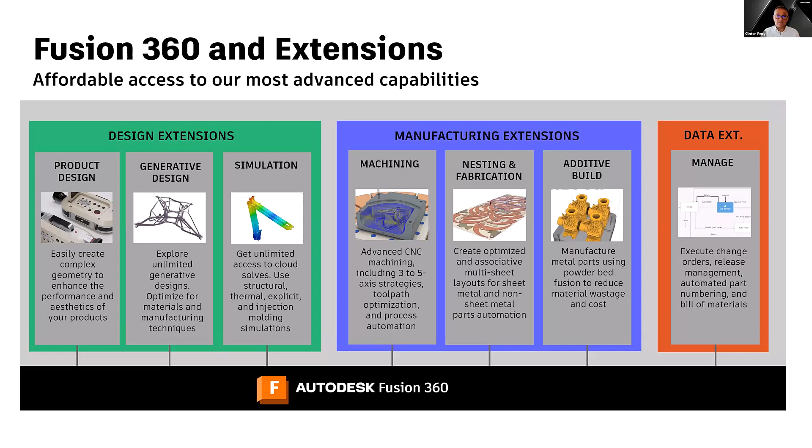And as we've seen, it provides additional value through a range of extensions for designers, for manufacturers, and for those needing more advanced data management tools. And let's not forget, access is flexible with annual, monthly, and daily options, meaning you only pay for what you need when you need it. And for those wanting to achieve even more value, you might be interested in our Fusion 360 for Manufacturing offering. This includes all the extensions you see listed here, with the added appeal that it costs up to 55% less than if you were to subscribe to the extensions individually.